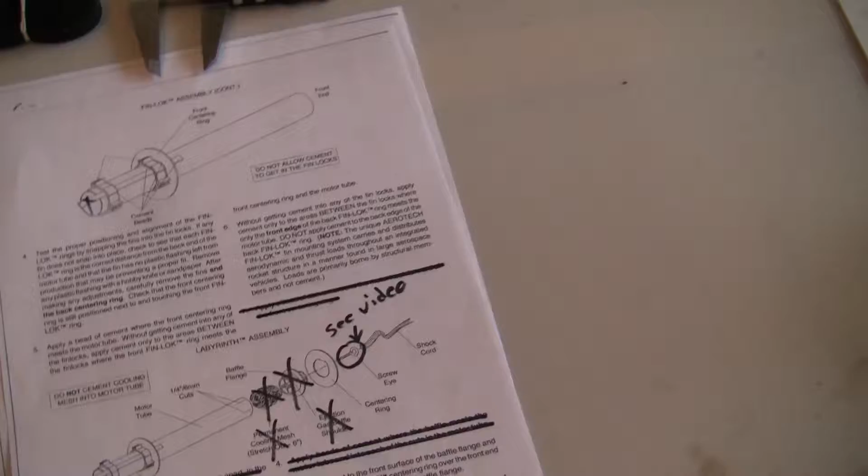So let's assume all this is dried, and now you're going to start working on the motor tube again.

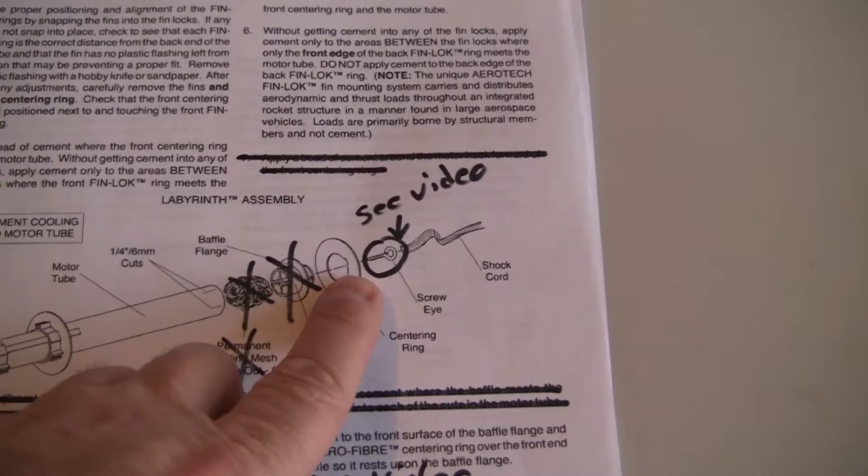Let's look at this assembly here. I've eliminated a lot of the parts we're not going to use. Basically, out of all this, we're only going to be attaching the third centering ring to the top of the motor tube, and we're going to substitute the hardware. I've marked out all the steps, and the only two steps we're going to do is applying cement to the centering ring and then putting the hardware in.

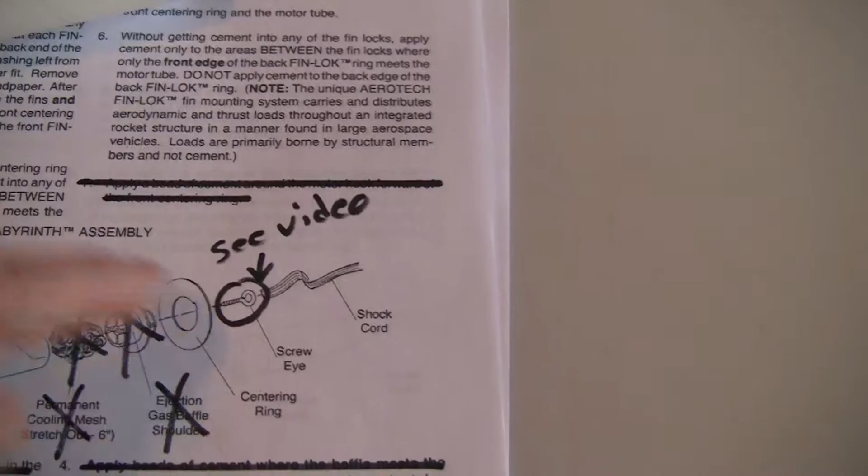Here's the changes. Take the centering ring, the top one, and draw yourself a line 1/4 inch from the top edge, then push the centering ring on. Make sure the notch lines up with your line on the tube. Come down 1/4 inch and then glue it in place. I would put glue on both sides and let that sit.

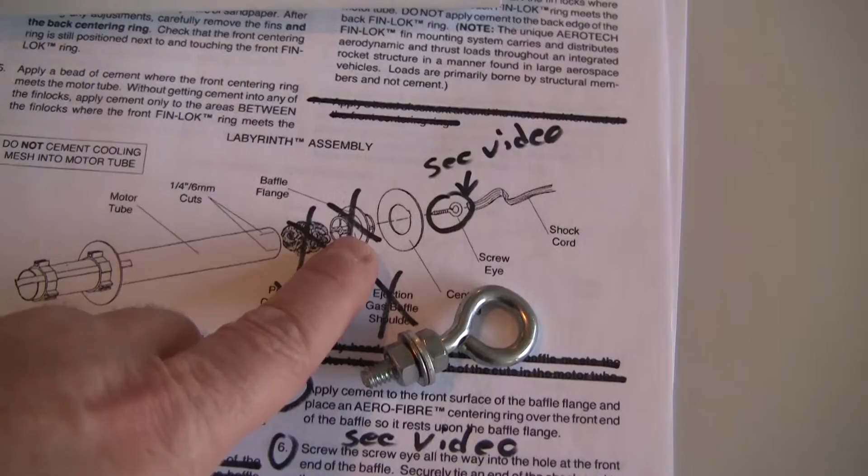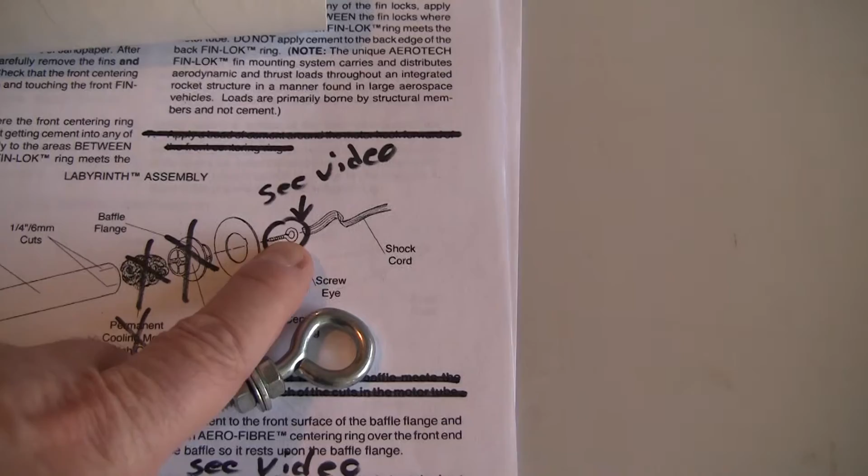Once all that's dried, we're going to substitute the hardware. In this assembly, they're using the baffle mesh plastic to attach this eye bolt, but this connection is very weak and we're not using that.

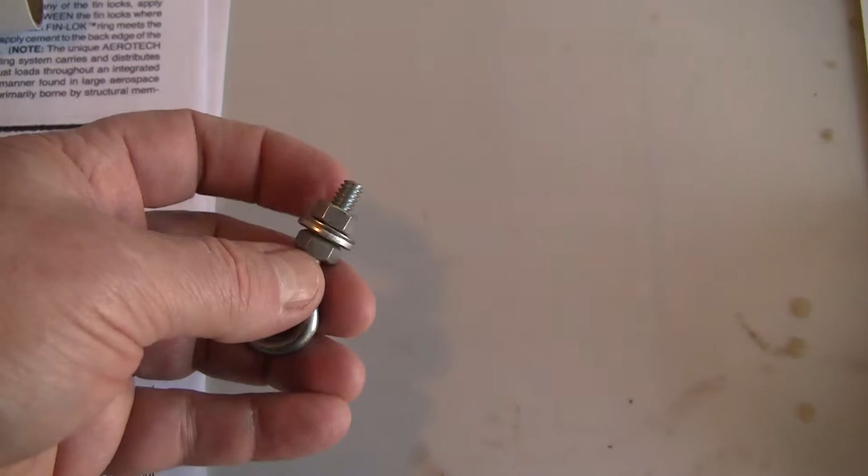So what I suggest is go to Lowe's and get a 1/4 eye bolt, a standard nut, 2 flat washers, and what's not illustrated here but I think you should get one of those nylon locking nuts instead of a standard nut, which is what I've got here.

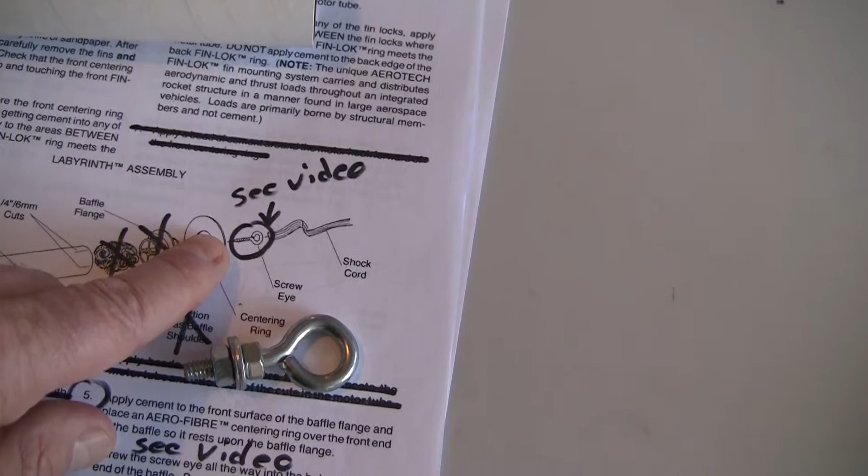Get this as an assembly, and what you're going to do is drill a hole once this is dried, halfway between where it meets the motor tube and the exterior.

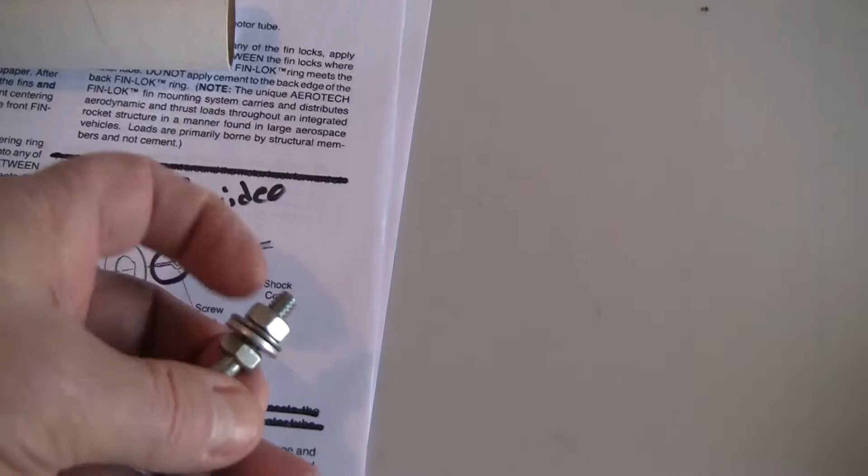Drill a clearance hole so this can go through, and you're going to snug this up with a flat washer on one side of this centering ring and the nut facing down. You want the eye bolt facing upwards of the tube, away from the fins. I'll try to give you a shot of what this looks like when it's done.

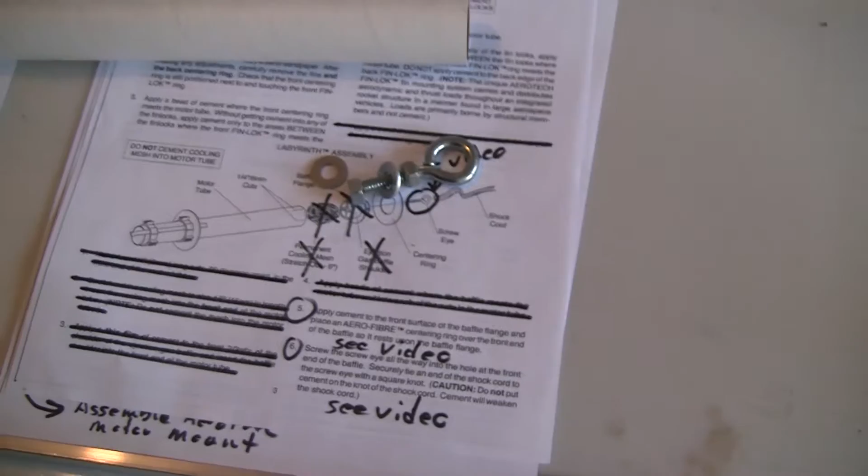If you follow the instructions, this is what you would end up with. You can see in this case, this is the plastic mesh baffle, and they put the eye bolt on top of that. It's screwed into that plastic, and it's a very weak connection - a sudden jolt on the parachute, particularly with the added weight of these reloads, could yank that out.

So instead, when you look down when the rocket is finished, you'll see a clear passage to the motor tube. I've tried to show you on the fiberglass one I built - this is what I did, and if you look down there, you can see right through the motor tube, and that top is the centering ring.

That's what we want. If you can see that, see the bigger eye bolt? I've mounted it halfway in between the motor tube and the body tube, and I've turned it where it is parallel with the body tube.

So what you want there, if you can look in and see, I've also got a connection like one of those bolts to hook it to. There you can see it pretty well. So what we would do - if you can see, I hope I'm explaining this well enough.

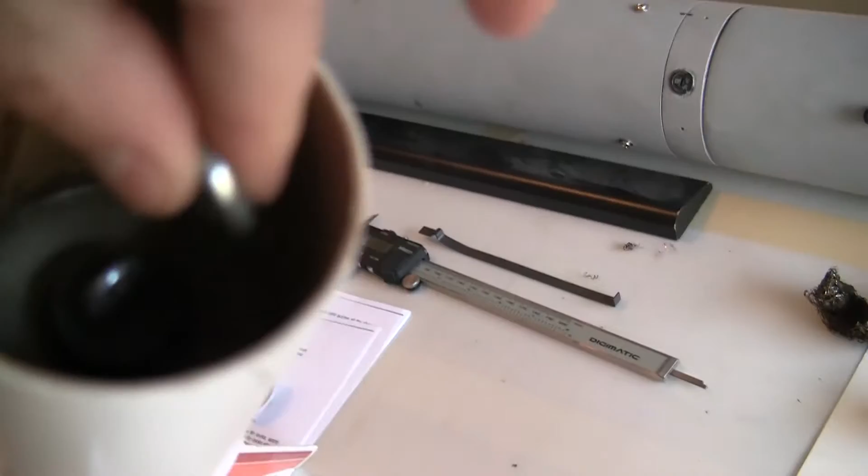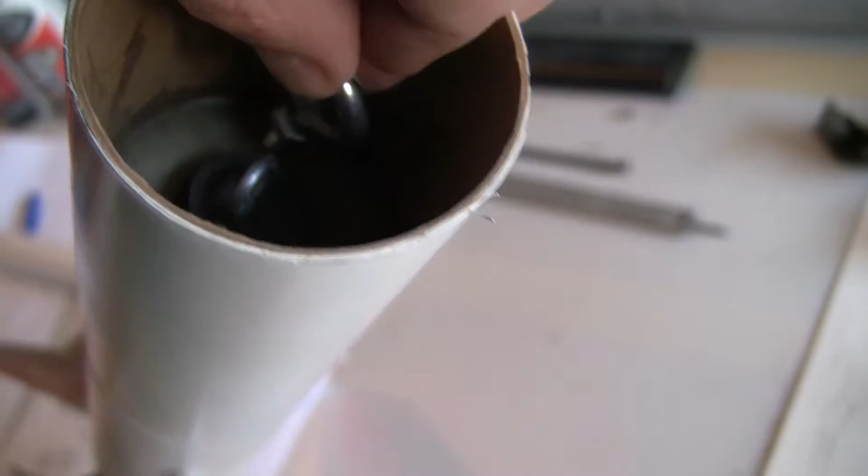Instead of that, we're putting this like that, about midway - that's what you want. You want to drill a hole, put this through, and that's the reason we're putting it on now, because you can get to the bottom side of the nut when you actually glue it on.

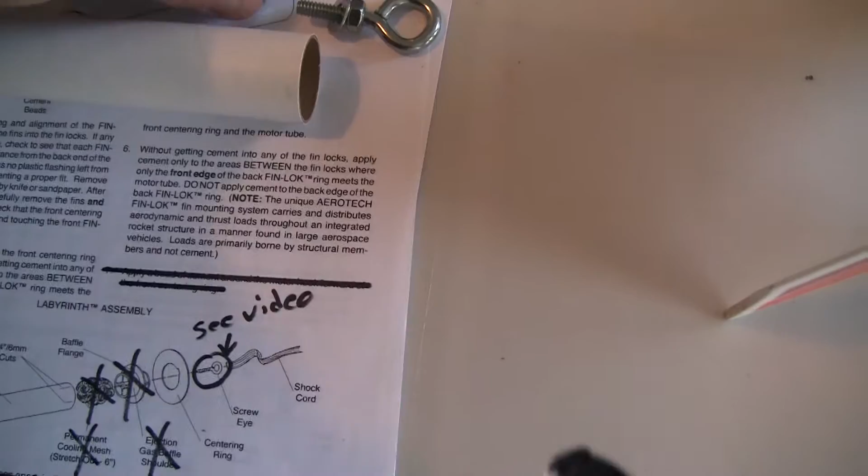So when you're all said and done, if you can imagine a centering ring here, you're going to have a nut, a flat washer, and then another flat washer, which I can't see - oh, here it is, on the other side of the centering ring, and then you'll have your nylon locking nut. Basically the assembly, once you turn the eye bolt correctly, should look like that.

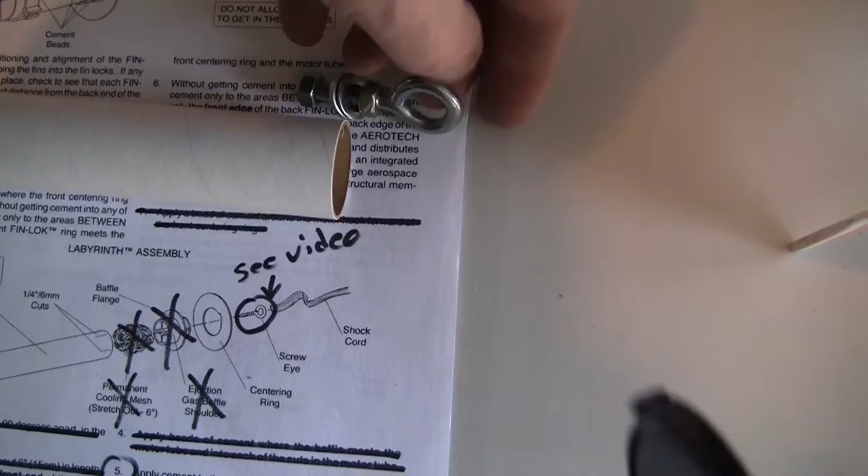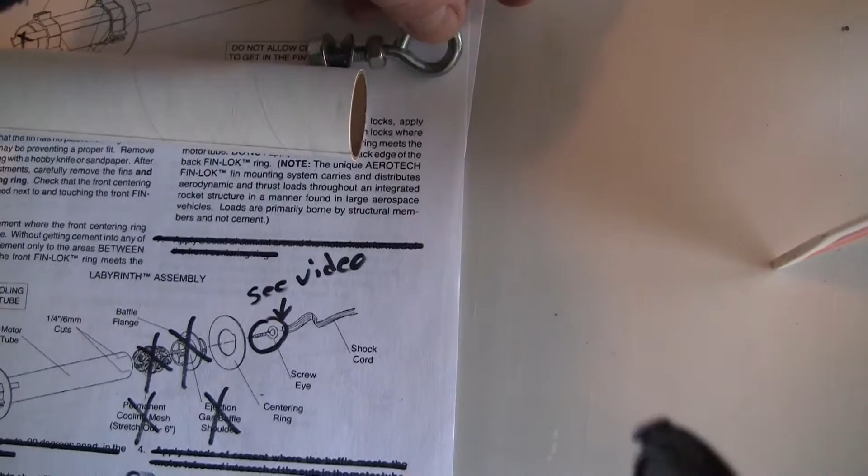So when you look down into the rocket, you'll see the top of the motor tube, you'll see the centering ring, and you'll see this eye bolt coming through. Now, the other hardware you should get is two of these - I don't know what they call them, but these hooks here.

In this case, you're going to tie your shock cord to this, and ultimately hook that to the eye bolt. That's going to be the connection point for the shock cord. I hope that's not confusing, but this is what we're doing as a substitute for these two.

The instructions say apply cement to the front surface of the baffle flange and place the AERO-FIBRE centering ring over the front end, where we're not putting the baffle. So you're taking the centering ring, coming a quarter inch down, lining the little cutaway in the centering ring with your line, and putting adhesive on both sides.

Then, instead of doing the mounting they describe in step 6, you're drilling a hole in the centering ring halfway between the motor and the outer edge of the centering ring. You're putting this through.

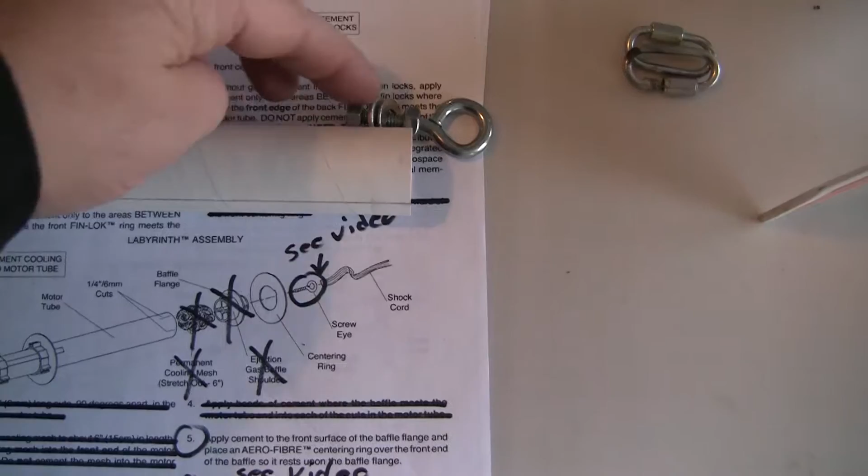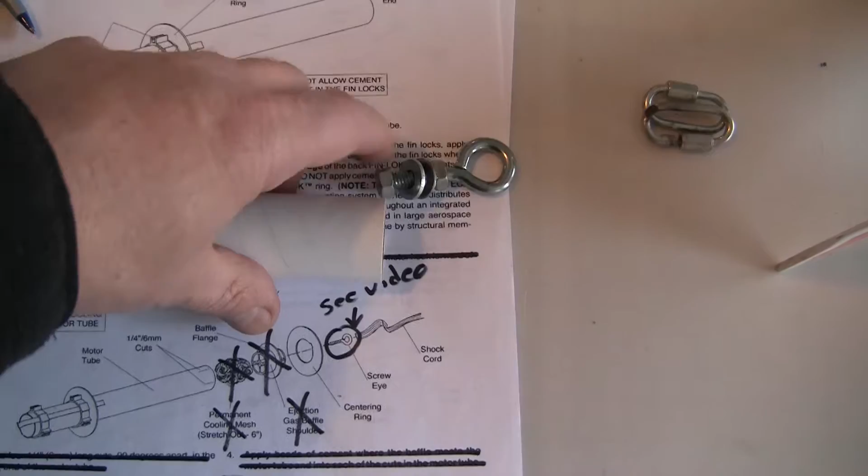You're putting a nut and a washer on the top side, and a washer and a locking nylon nut on the bottom side, and you cinch that up. Ultimately you turn this eye bolt so it's parallel with the edge of the rocket. After that, I'd recommend putting some adhesive on both sides of the screw, because you don't want that coming off.

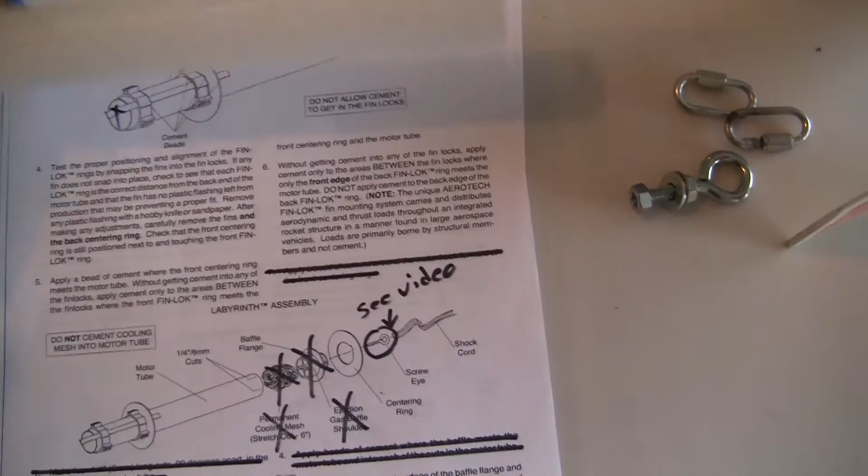Believe it or not, that's probably the most confusing change, so hopefully that's clear enough for you.

Once you've got the third centering ring at the top and your hardware mounted and glued, I would set this aside and let it dry for another 24 hours.

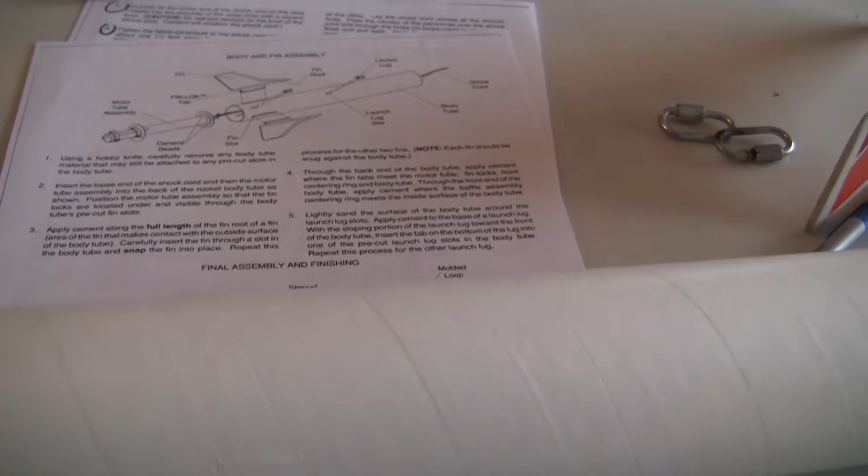Now, assuming this is your second day, the putty on this tube should have dried. Take some sandpaper, anywhere from 200 to 100 grit, and go over this. You'll be taking most of the putty off, but leaving putty in the grooves. You basically want to repeat this process, sanding and adding putty.

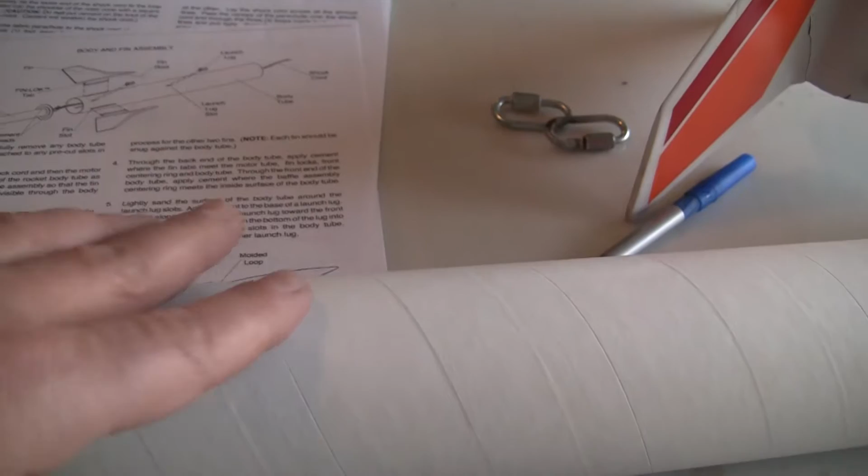Until, just to the touch, you don't feel any significant bumps or divots. The primer is going to fill in some as well, but we want to do as much with the putty as we can.

So depending on how well it came out the first time, you may want to do a second round to get this tube all ready.

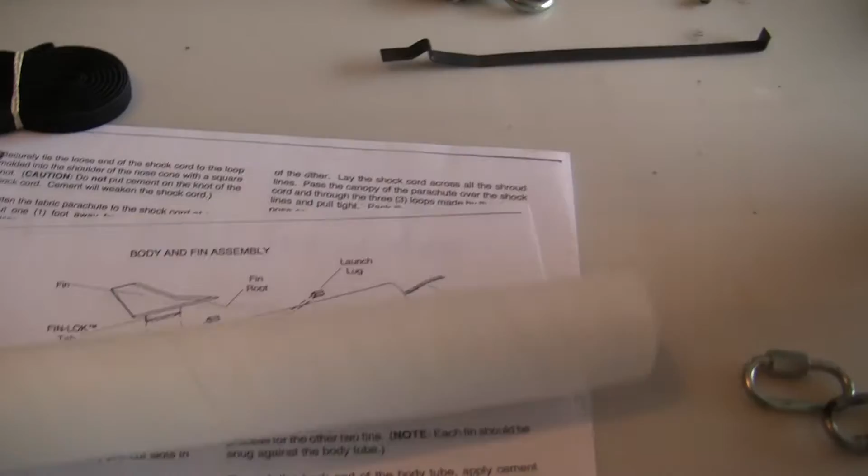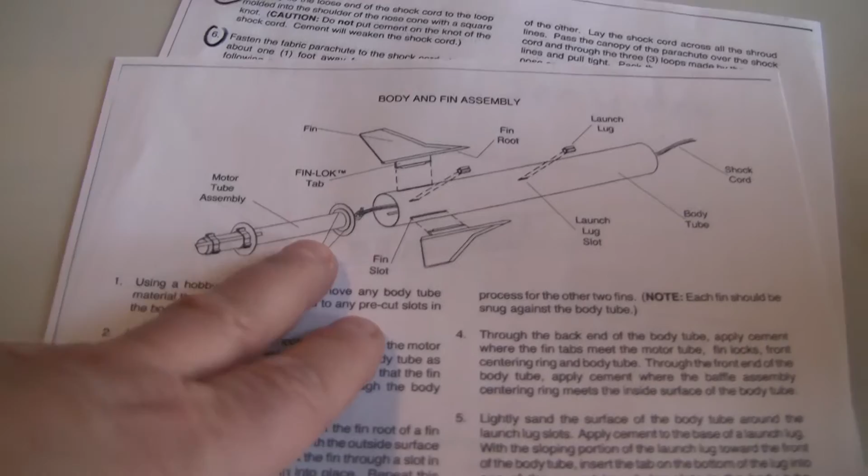So before we start on page 4, the assumption is all the assemblies on the motor tube have dried, the hardware is dried, and now you're getting ready to introduce the motor tube to the body tube and to the fin. So this is where it all comes together.

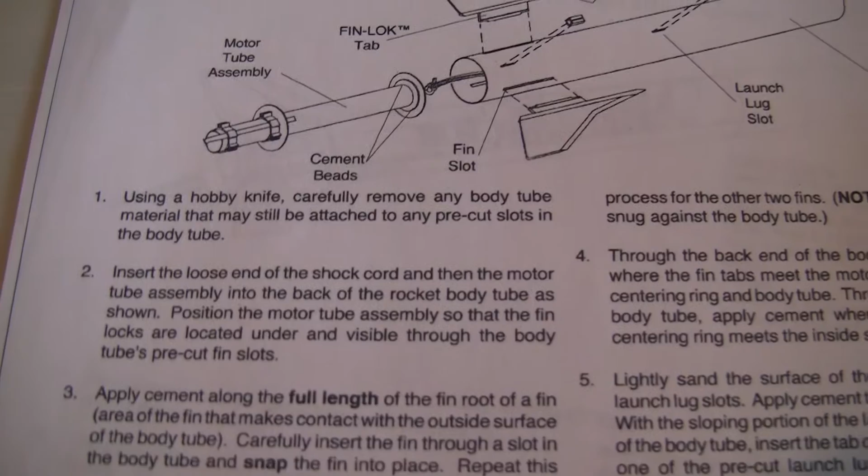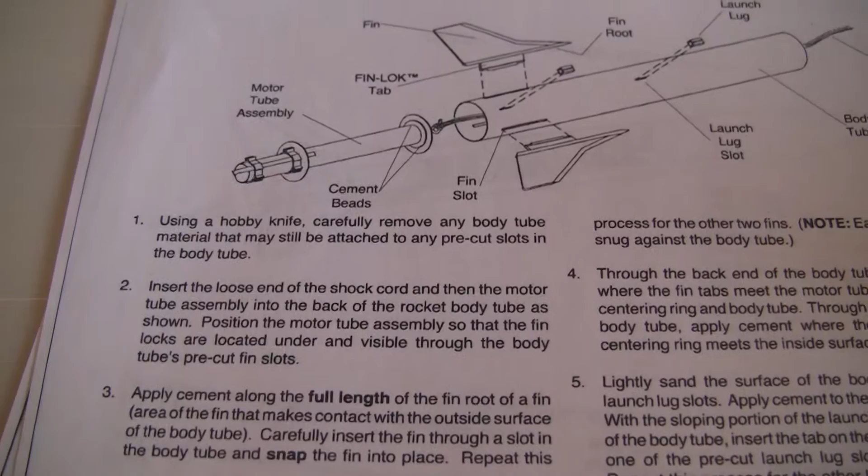Step 1 says, using a hobby knife, carefully remove any body tube material that may still be attached to any pre-cut slots in the body tube. If you did that as I instructed before, you probably don't have to do any more — that's already taken care of.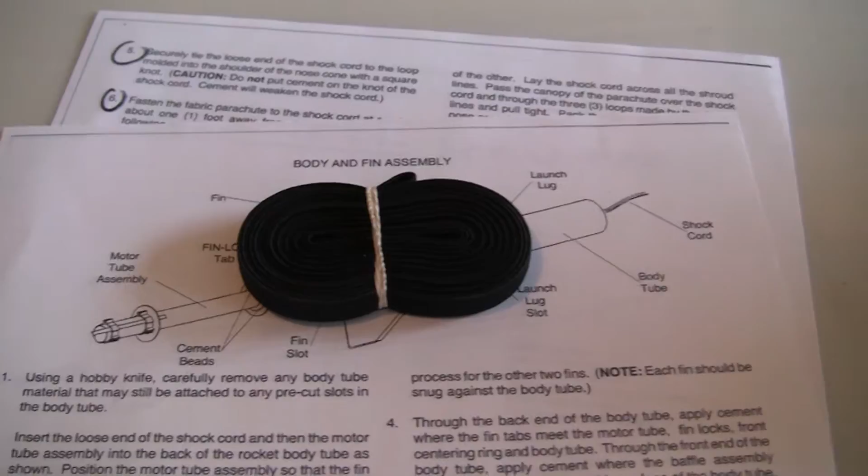Now you insert the loose end of the shock cord. Now what I didn't say is you're going to take the shock cord and loop it through this connector here, and then tie a slip knot.

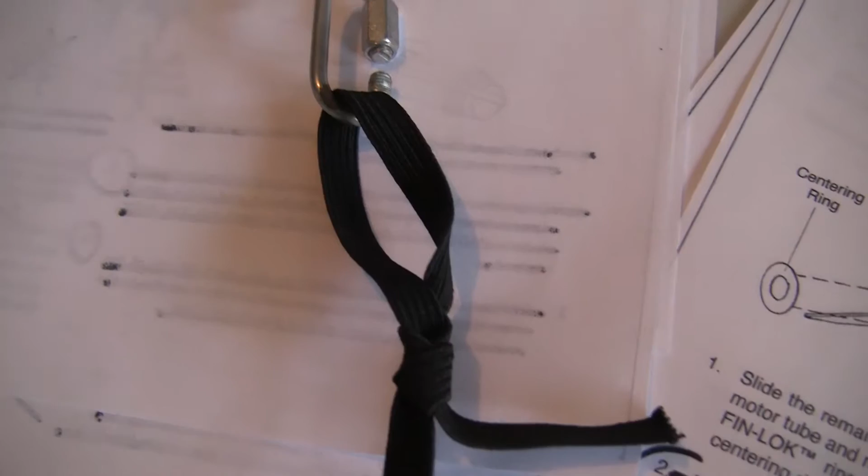So here I've tied my slip knot. I'm going to cinch that up until it's tight, like so.

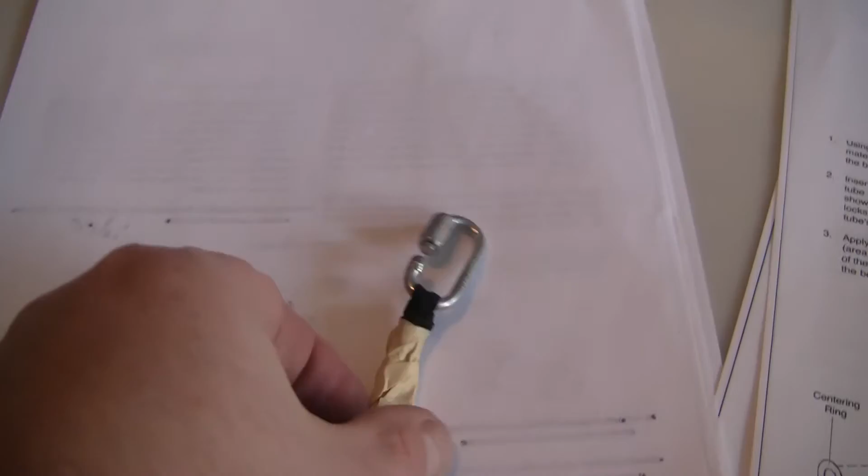Now get some masking tape. I just loop it around, and basically taking all the loose ends, the knot and everything, we mask and tape that to the shock cord. When you push all this together, you'll be surprised how well that holds everything together, keeps loose ends from getting in the way, and keeps the knot from slipping.

So it's something I learned. It's a pretty good trick.

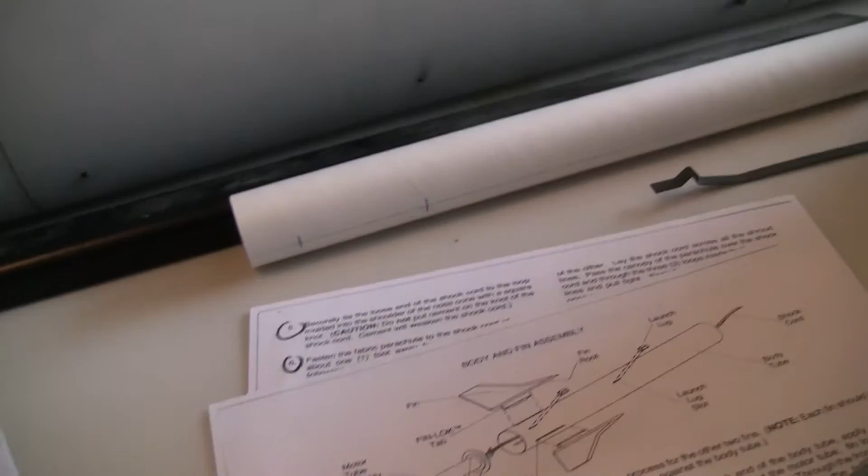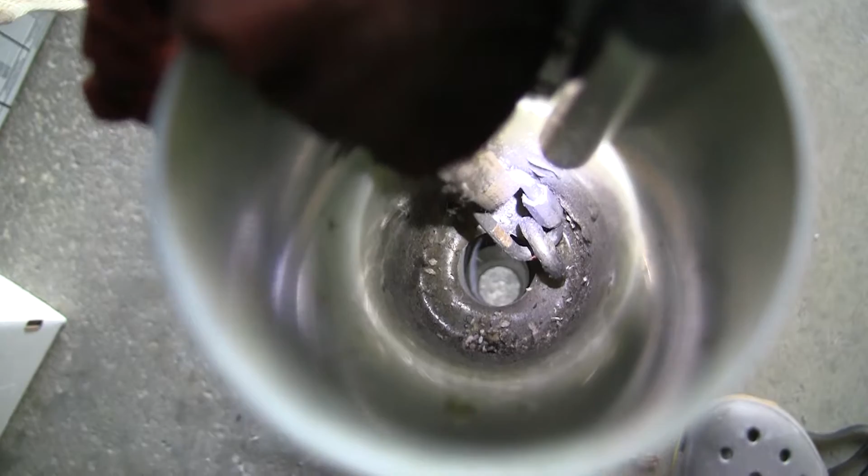So anyway, you're going to take this, and in your case, your hardware is going to be on your rocket, so you go ahead and make this connection here to the eye bolt. When your connection's made, again make sure your clamp will fit over the eye of the quarter-20 eye bolt, but basically you secure it, and that's what it's going to look like when it's done.

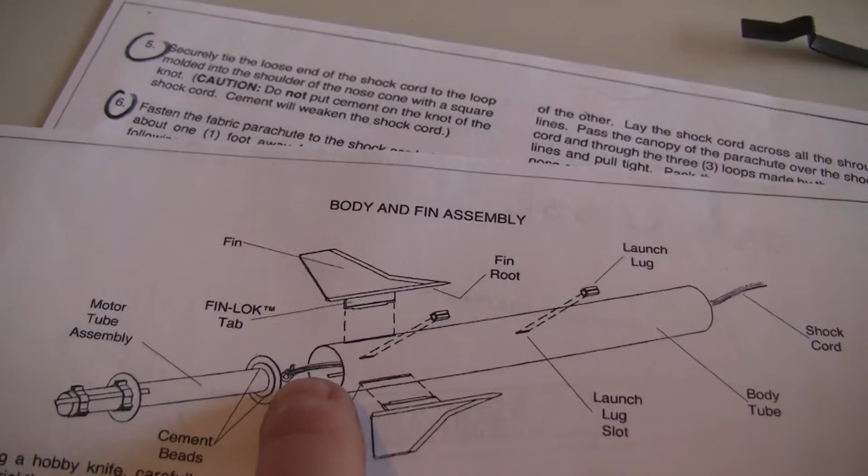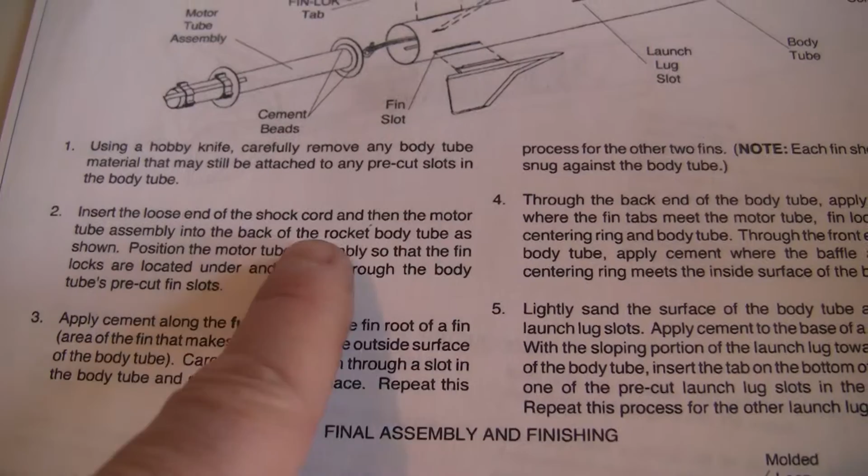When that's done, you're going to take the engine tube and pull the end of the shock cord through, the other end already being attached to the motor mount. Insert the loose end of the shock cord and then the motor tube assembly into the back end of the rocket tube as shown, positioning it so the fin locks are visible through the body tube's pre-cut openings.

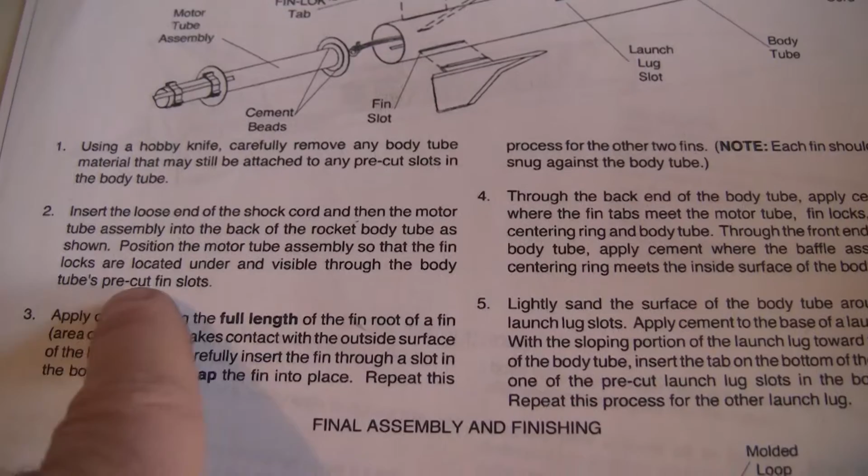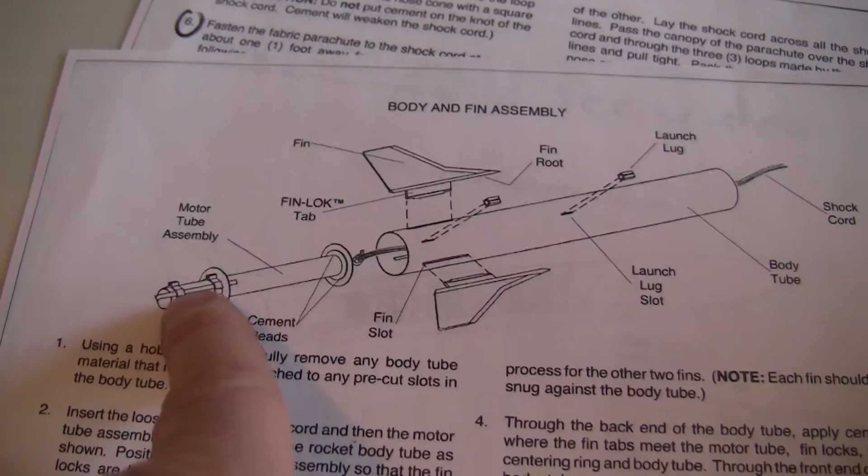So you feed your shock cord through, then start feeding your motor tube, which now has the two centering rings glued in place. Slide it up into the tube, making sure your fin locks line up with the cutouts of the body tube. You'll be putting the motor tube in and looking through here, twisting it until the fin locks line up and you can see them through the cutouts.

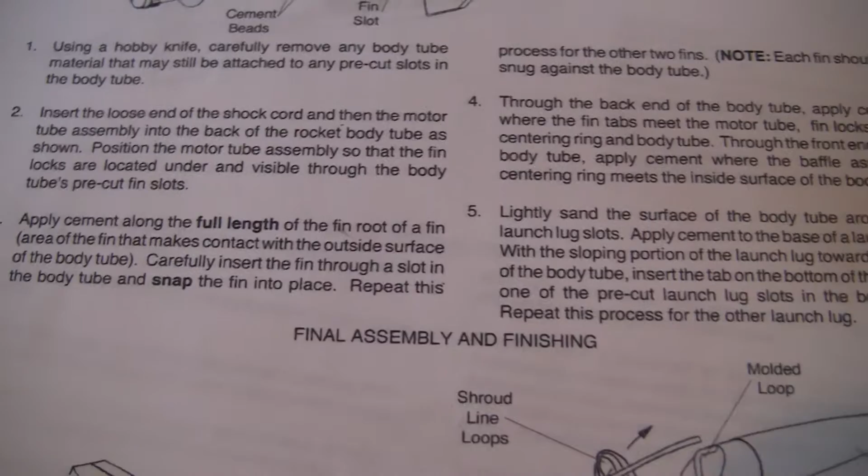Now you apply cement along the full length of the fin root, that's this edge right here, and carefully insert it through the slot in the body tube and snap into place. Repeat this process for the other two fins. Each fin should be snug against the body.

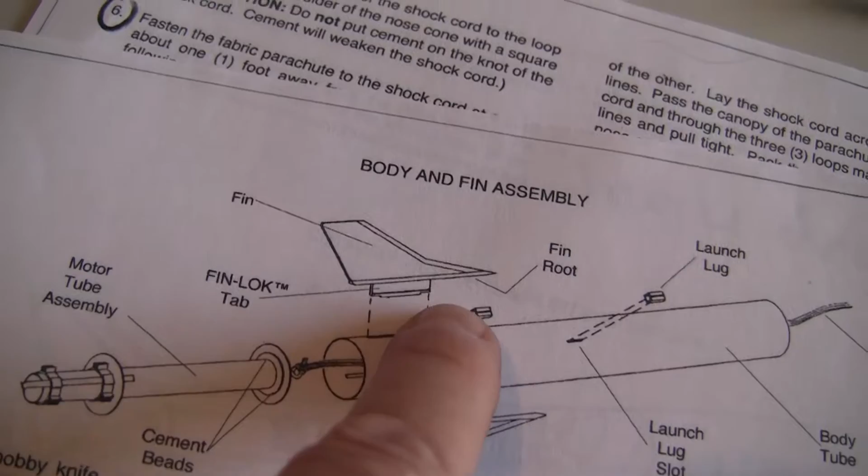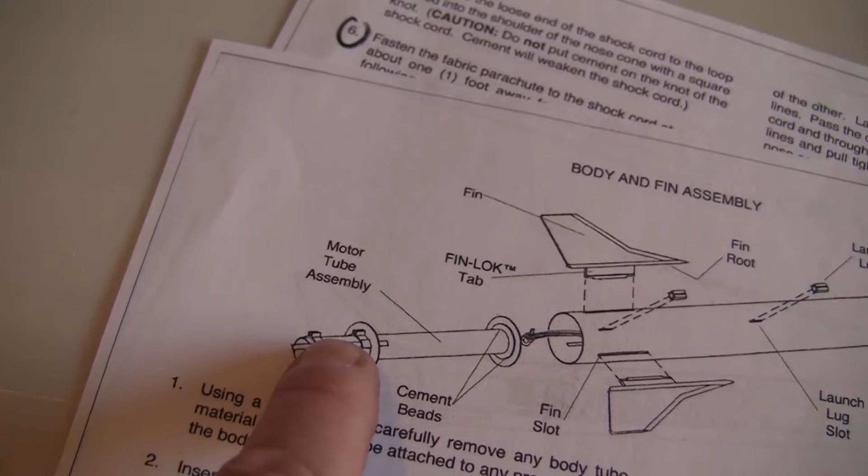So what I've done is make sure there was plenty of glue along this edge, bottom of the tab, along this edge. I also go inside from the back end of the body tube with a dowel with some adhesive, and put adhesive all along the locks as well as the motor tube, so when this comes in, it's hitting adhesive on both sides.

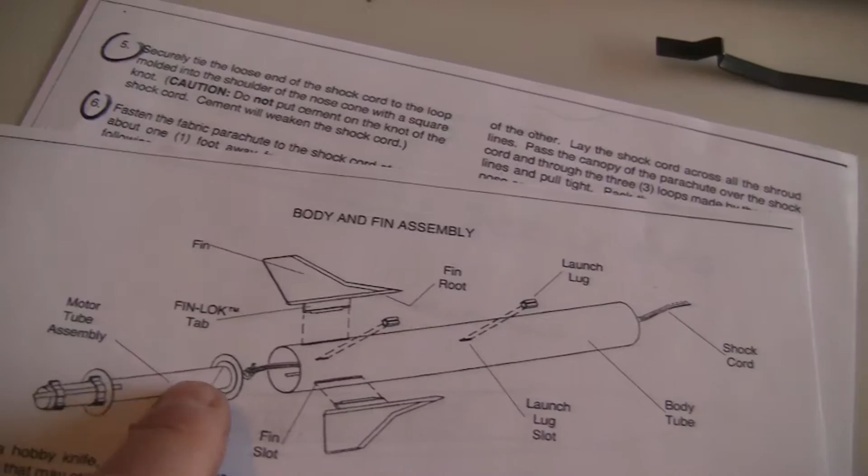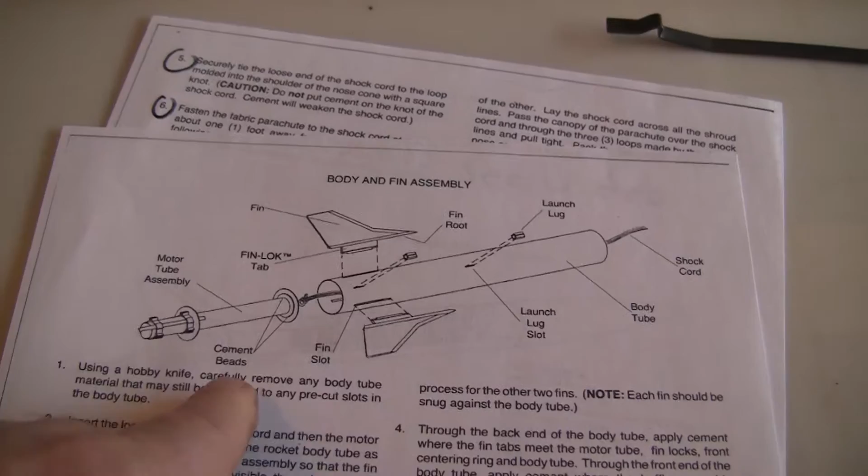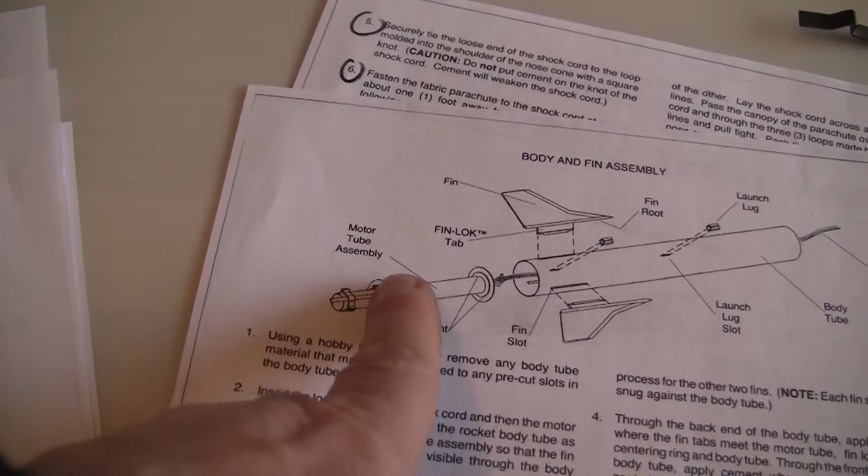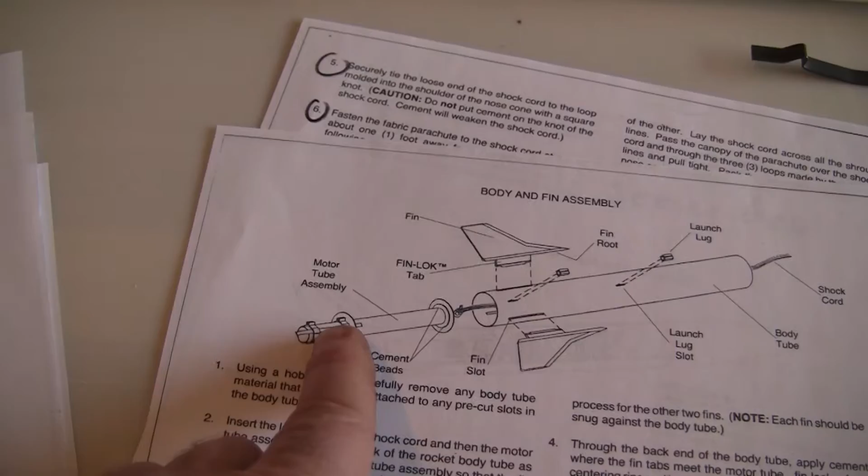After you snap the fins in place, let that dry. When it's dry, take a dowel - that's why we left this centering ring off - get your adhesive and go in there and liberally coat adhesive all inside where the fins connect, everything. You can't use too much adhesive. The only thing is, don't allow any adhesive to get on the back side of this ring, because you still have the other centering ring to put on, and you don't want adhesive in the way.

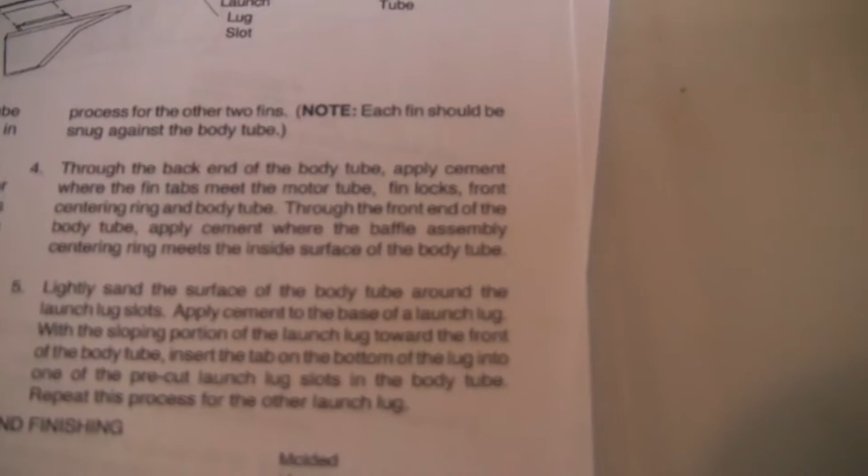So step 4: through the back end of the body tube, apply cement where the fin tabs meet the motor tube, fin locks, front centering ring, and the body tube. Through the front end of the body tube, apply cement where the baffle assembly centering ring meets the inside surface of the body tube.

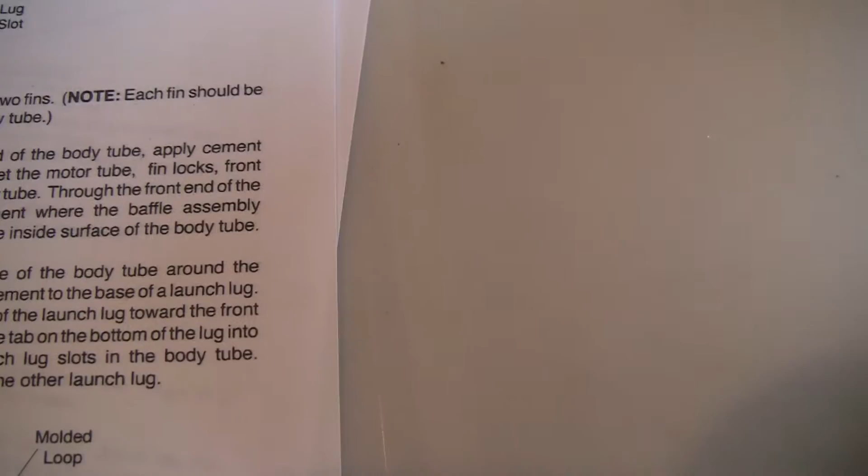So what they're talking about is, here's your centering ring, and you want to make sure you put adhesive all along where the centering ring meets the body tube. You also want to go from the back end as well, and apply cement to this centering ring where it touches the body tube.

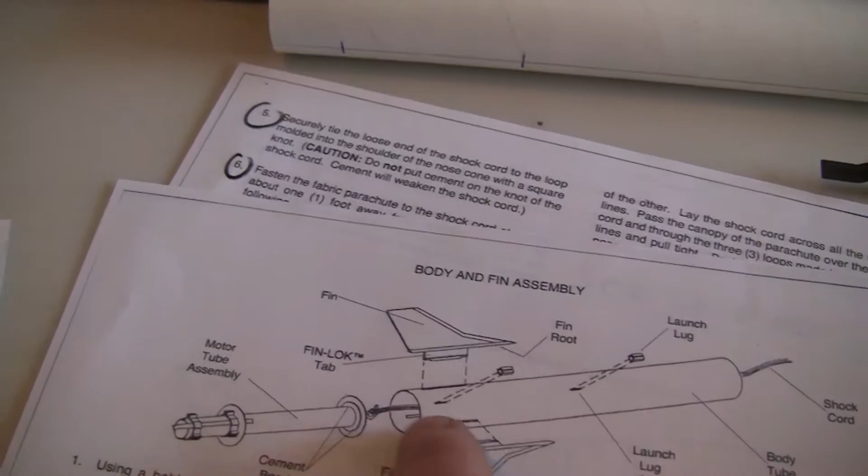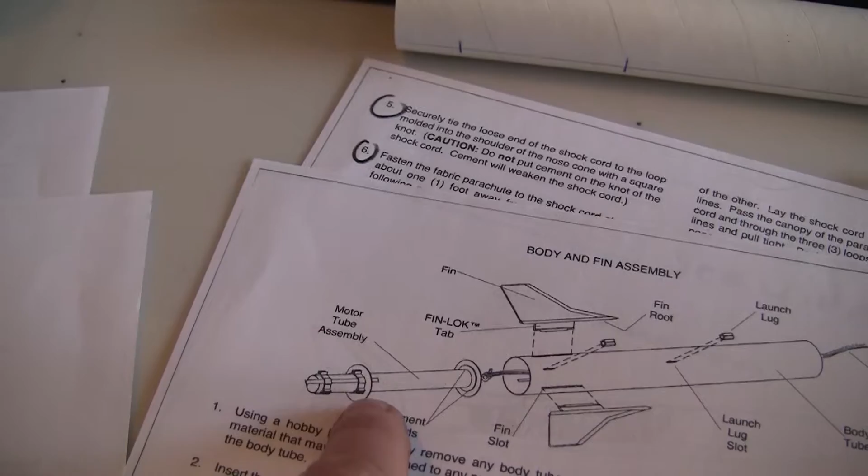That's the reason they're leaving the bottom centering ring off. When you've slid this up with the dowel from this side, you can put adhesive all around this centering ring. Then with a dowel from this side, you can get adhesive on all the fin roots, everywhere the centering ring meets the inside of the body tube.

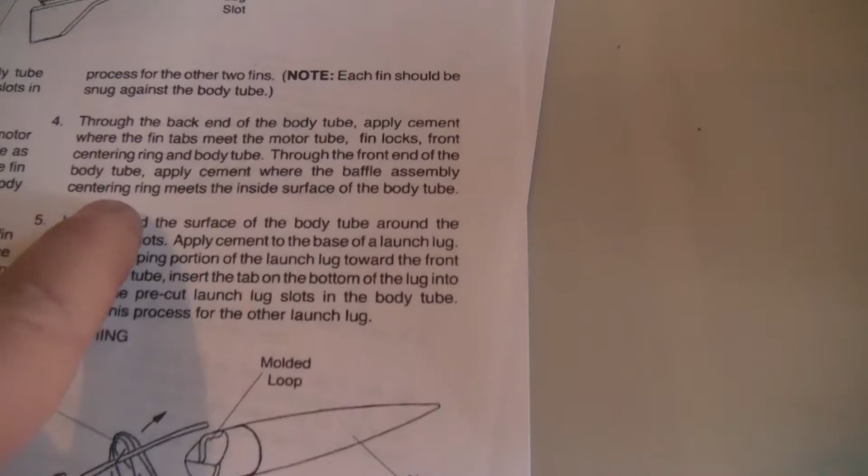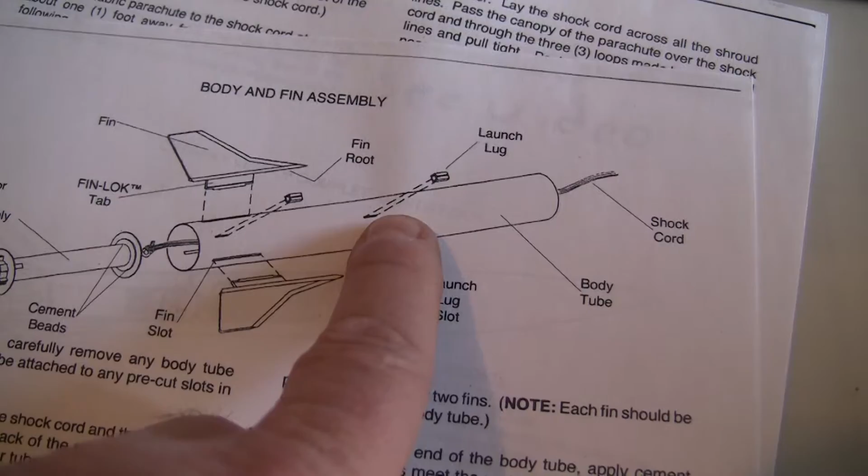Now they say lightly sand the surface of the body tube around the launch lug location - that was the two points, the other two points where you cleared out material. You apply cement to the base of the launch lug. With the sloping portion of the launch lug toward the front of the body tube, insert the tab on the bottom of the lug into one of the pre-cut launch lug slots in the body tube. Repeat this process for the other launch lug.

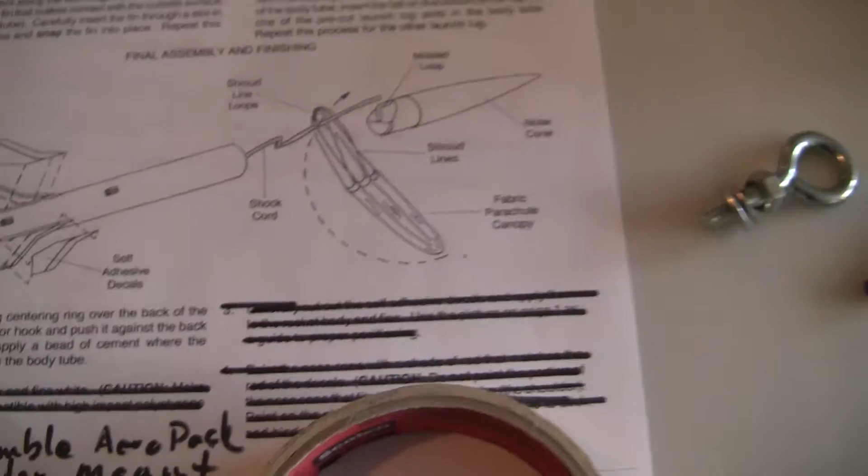Now, having done this before, you're basically putting these guys on here. You want the sloping end pointed upwards. My advice is put the adhesive underneath these, put them on, and then put a piece of tape over them to hold them. You want these really snug and square with the tube, so put some tape around to hold it in place and let that dry.

One thing I learned from doing an Aerotech Initiator kit before - if you don't get those pre-cut areas cleared out really well, the guide piece doesn't sit flat or square with the rocket. So make sure if you glue them down and find they're not sitting flat, put a hobby knife in there, pop it off, and re-glue it.

Once you've done that, I've taken a section of the 1/4 inch rod. My launch pad comes with a 1/4 inch rod that you can unscrew and make a small section. I put it through both of them, and you want it to slide back and forth pretty well.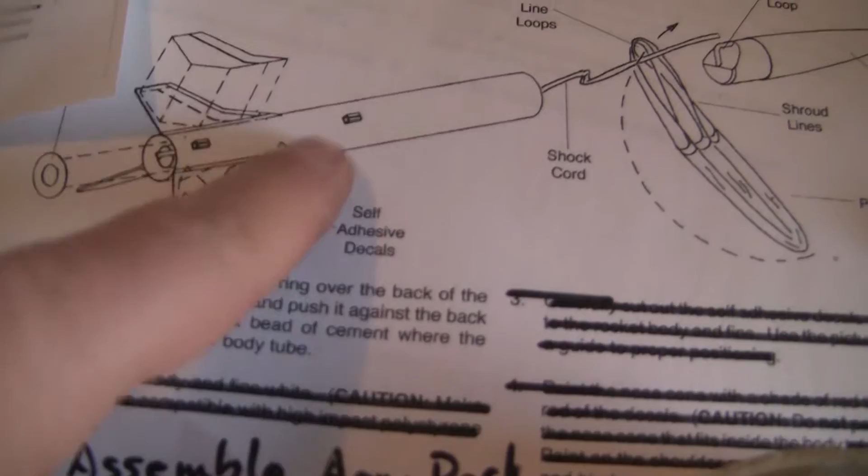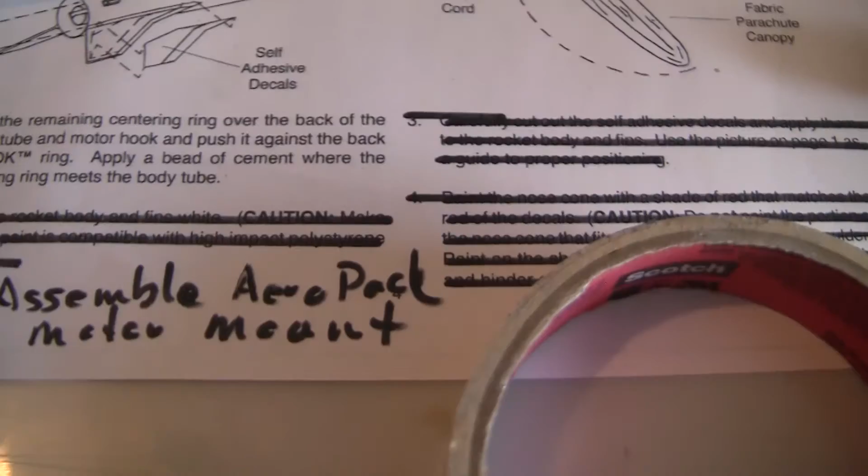So that then brings us, once this whole assembly here is dried, you then make sure you have all your adhesive from the back side. Now they're telling you to slide the remaining centering ring over the back end of the motor tube and push it against the back fin lock ring.

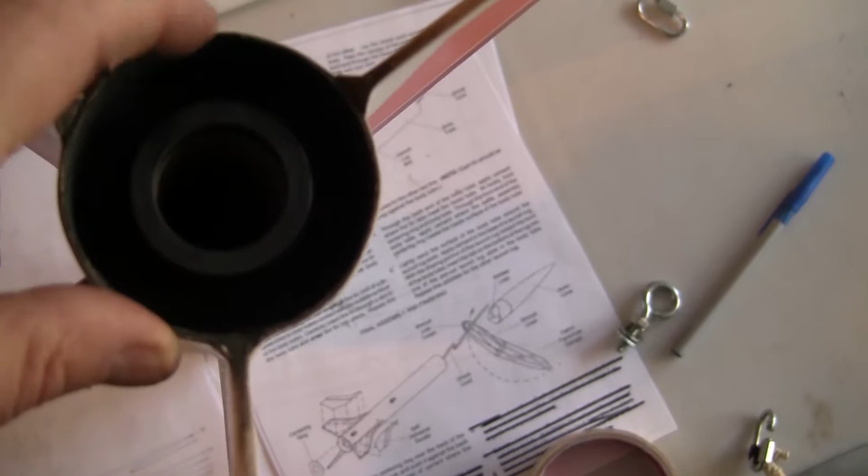Apply a bead of cement where the centering ring meets the body tube. So that's all this back in here. So basically, if I can get this to stand up, you're pushing, assuming you got all the adhesive inside you need, you push the remaining centering ring in, lining up the keyway with your line, and pushing it down until it stops flush against where the fin lock is. And again, you'll put adhesive all around between the centering ring and the body tube, and you also put a bead of adhesive around the motor tube, and you let that dry, preferably sitting straight up.

The next steps have been deleted, and this is when you glue the aero pack assembly. Now the aero pack here, you can see I take the ring off. You remove the outer ring while you're doing this, and basically this is where you bring your JB weld in. You take the inner ring, you put JB weld around the outer edge of the motor tube. You put JB weld on the inside edge of this inner ring, and then you should press this ring over the motor tube. You should do a test fit first because it may require a little bit of sanding on the motor tube. Sometimes these are a tight fit, but once the fit is good, you put the JB weld on, you push it on.

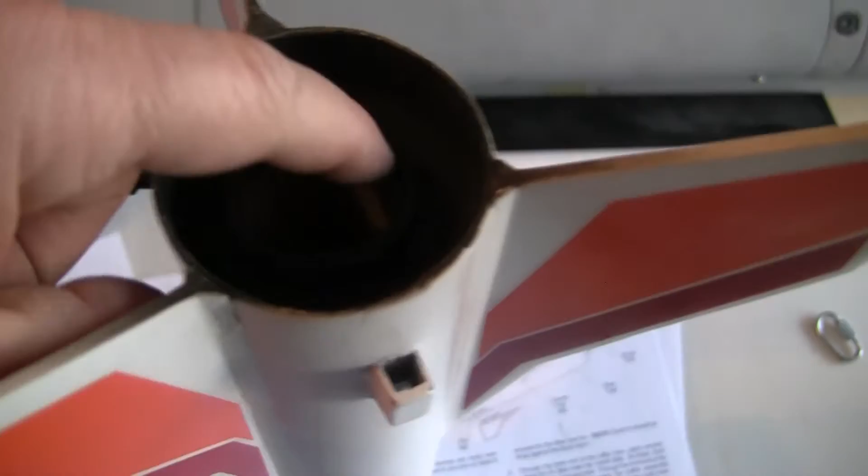Once it's pushed on, then take a rag and wipe any JB weld that may have oozed out. You don't want any bead of glue on the inside. This is a pretty snug fit for the CTI engine motor mount. So if you get some, you have to sand it later, but if you can wipe it out now, that would be better.

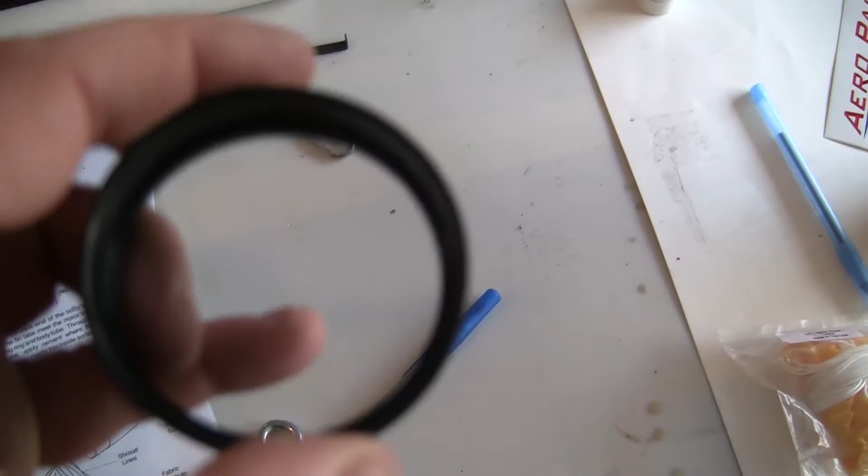So although this is a big ring, you'll notice there's a stop ring on the inside. That's where you're pushing. You can see the rib sections here, that helps grasp the motor tube. So basically the motor tube will come into here and would bottom out at that ridge. So this is the surface you put the JB weld. You push it on like so, and you let it dry.

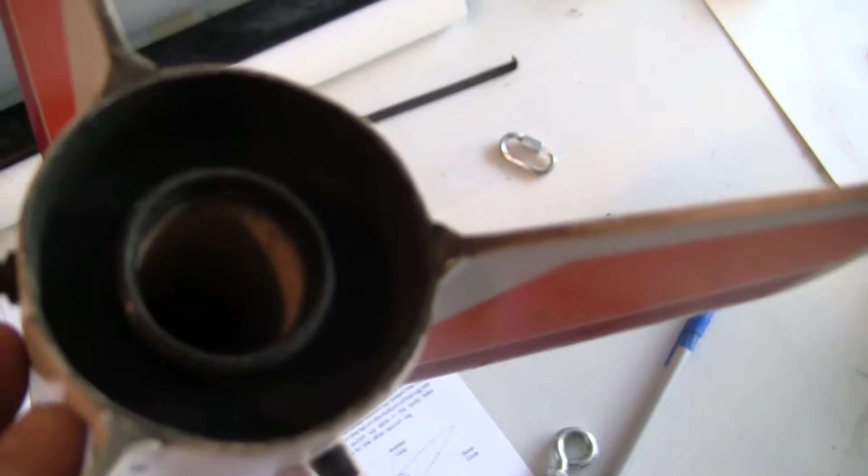Once it's done and it's dried, the outer ring should be able to screw on like so.

So assuming you do everything right, the way this works, you've got your motor tube, which if you did it right has nothing inside. You got your retention inner ring. You would then get your motor tube, motor tube should go in. You should probably do a test fit. It goes in like so. Goes all the way in. And you can see how the flange, the retaining ring of the engine tube, goes inside the retaining ring like so. And this enables you to put the cap on.

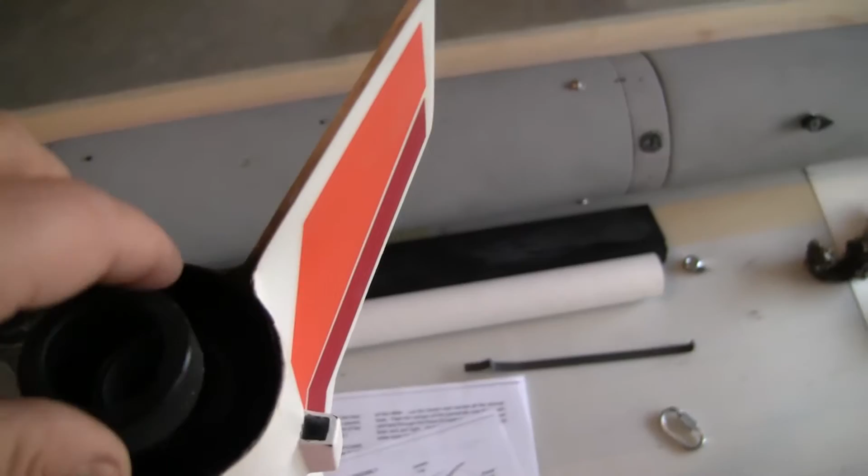And that is what holds the negative force. Positive force is with the motor tube against the engine casing, and the negative force is the retaining ring of the motor tube casing against this piece here. So that's how it goes in. So again, to take it out, you take the cap off. And we pull it up like so. So if that fits in and you can put the cap on, you've pretty much made all the modifications correctly.

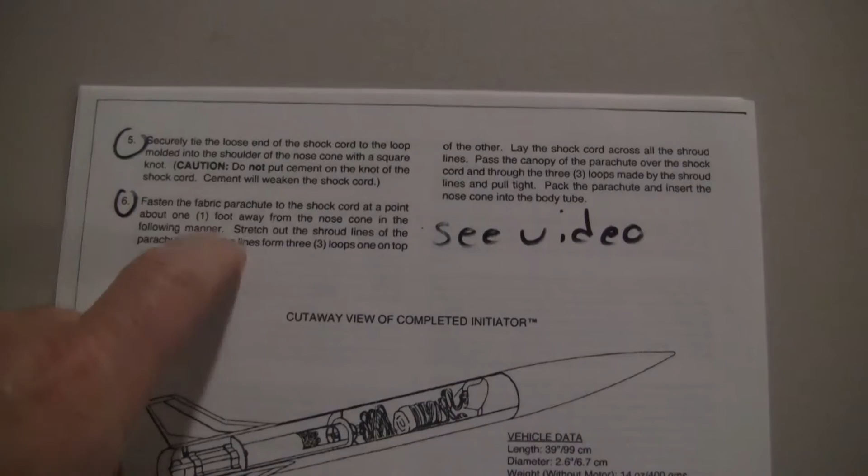So we continue our assembly process on page 5. At the very top, I've circled these 2 steps because although we'll be doing these steps in this order, again, there's some slight modifications and enhancements that I think this video will help.

So step 5 has you securing the shock cord to the nose cone. So the assumption is you have built the bottom end of the rocket. Obviously yours is not painted yet, but you would have already pushed through the shock cord, and it's attached to where, if we can see it, with our connection at the bottom. So I would not put the parachute on it this time, and I would go ahead and start most of your painting. At least get the primer on at this point.

So one thing about painting, if you notice on mine where I've painted the nose cone, I painted this one just like the kit requires. So basically you're painting the nose cone red, and you're painting the whole bottom half white. All this rest is decal, so it makes it pretty easy. But before you start painting, take this section of the nose cone that goes inside the rocket and coat this with blue tape. If you've got some white or blue tape, it'll make it easier.

You just don't want any paint in this section. And when you're painting the rocket, you also want to put some rags or paper towels in this area, because you don't want paint going on in this area.

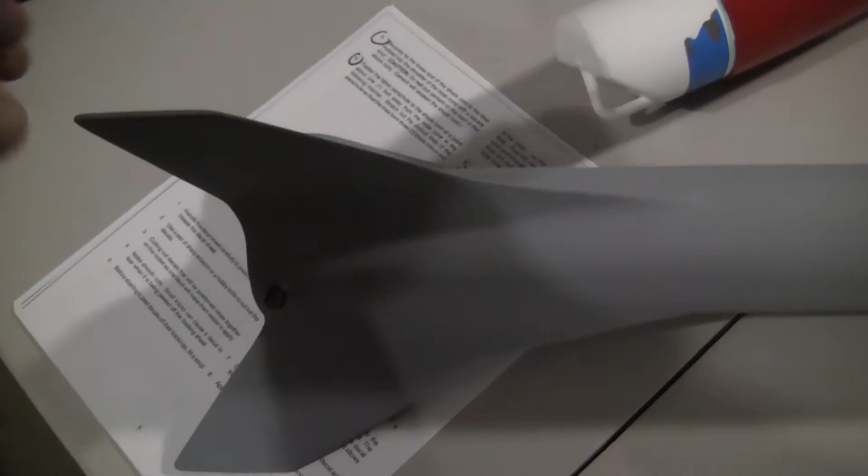So this one, which I fly quite a bit, is in primer gray. I've done it a couple times to the point you don't see really any imperfections. This rocket is ready to be painted in final color, but I like to fly them a couple times in primer form. That way if there's any problem, any damages, or fins aren't secure, it's easier to patch it and correct the problem than it is after the final paint job.

This is obviously a situation where I learned that lesson the hard way. So I would go ahead and at least get it in primer gray before we go on to steps 5 and 6.

Okay, so we're going to assume the rocket has been painted, at least in primer form. And now you're ready to start working on the parachute assembly. So step 5 is basically telling you to take the shock cord that you fed through the rocket and tie it onto this part here.

I'm going to tell you a few things to do that the instructions don't say that I found to help out. So first, you're going to take the—you get that, Jerry?

You're going to take the shock cord and go through and basically make a slip knot. What I like to do is tie a knot at the end so it doesn't pull through, just for safety's sake. But then I make a slip knot like this.

You cinch that up, and once we make the knot, we pull it tight, like that. So that's the knot that I use to tie it.

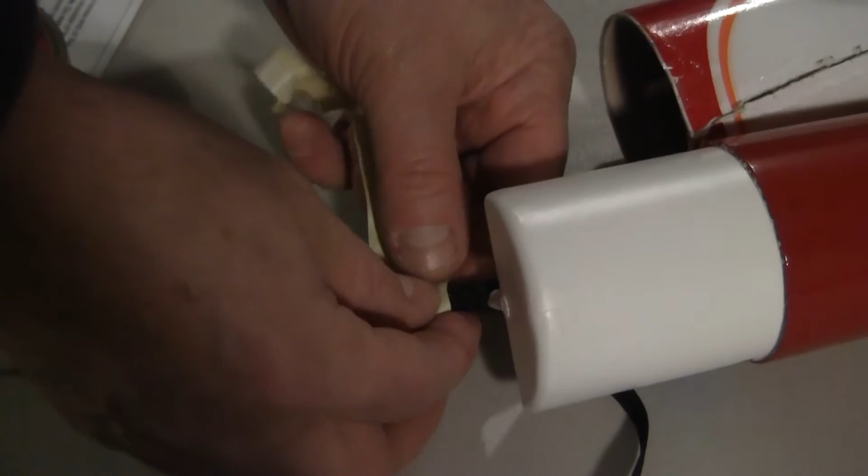Now I take, like I did with the other connection, and I found this really works well because I've tried to take these off before, and the masking tape really holds this knot together. So of course I got some old masking tape here, but the idea is you basically start right below the knot, you go around, you put this loose end down here, and you go around and basically just encase all the loose ends of the shock cord with the masking tape.

Get a little more. I recommend using better masking tape than this, but there, that's better. So we'll go over the knot as well. And once you get it around, then you just squeeze it, make it conform to the shock cord, and that makes the connection to the nose cone.

So the next step, step 6, tells you to attach the parachute. And this one also we do some modifications. So I take the nose cone, I put it next to the rocket, and that gives me kind of a halfway point on the shock cord.

And the way I've been taught is you basically take, instead of halfway, about 1/3 of the way by the cone, and you tie a loop like this in the shock cord. So the idea is when you stretch it out, you've got an area about a third, maybe a little less, from the shock cord to the main body. So it's 2/3 from this loop to the main rocket, a third from here to the nose cone.

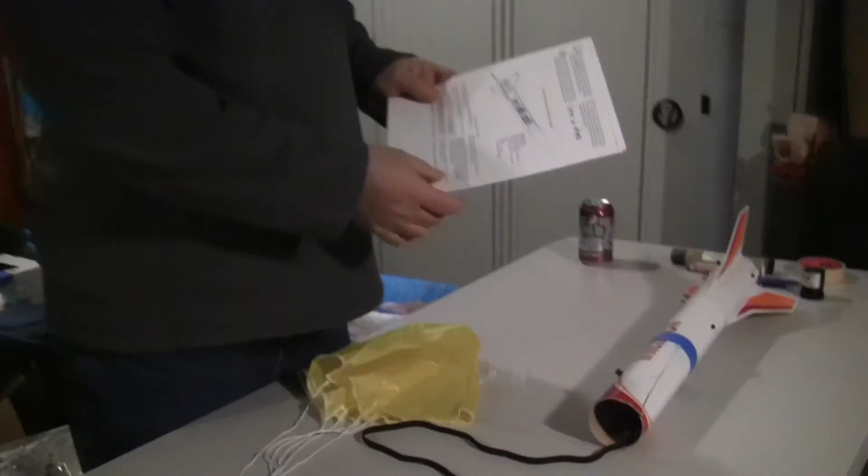I can't overemphasize using the soapy water that they recommend. So although it's the traditional peel-off type, if you soak it in water and then brush on soapy water, and put the decal on, you can move it around a little bit until the water starts evaporating, then it'll start bonding. So it allows you to push and get all the bubbles out.

So I recommend what they suggest here, using warm water and a little bit of soap to pre-wet the stickers. Basically you pull them off first, put them in the water, lay them out, and use something like a sponge to push out the air bubbles. But that's the assembly. So in the next video we'll be getting the rocket ready for flight.